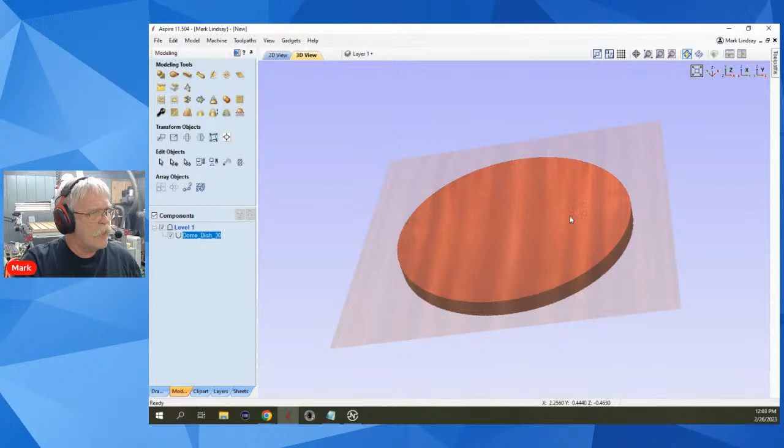Let me get over here and prove my ignorance. We'll get into Aspire, and yes, I'll go over here into my clip art. Let's see, I'll just pull up a shallow dish. Then I'll shift and make that a little bit bigger, and go into the modeling tab, and I'm going to change that combine mode to subtract to make it a dish rather than a dome.

Let's go back into clip art and let's find something else, something to put in here. Lots of stuff already in a dish. Let's see, I'm not even really sure what application to use. Let's go for this - we'll put this in the middle and expand this out just a little bit here.

Do you have a specific question about merge lowest? Okay, and then we'll go back over into the modeling tab. Or is this just an in-general, what does it do, type of question?

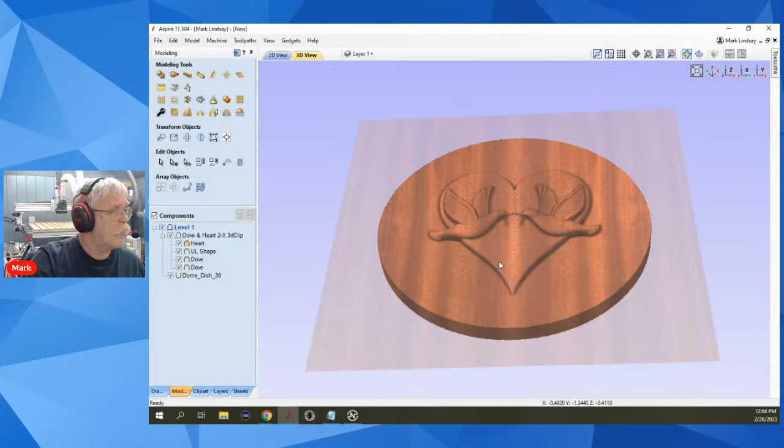Okay, here, let's bring this back up like so. I've got the dove set to add, so it'll sit on top of that dish. Let's go right click into the combine mode. We have merge, add, subtract, merge low - is this what you're referring to?

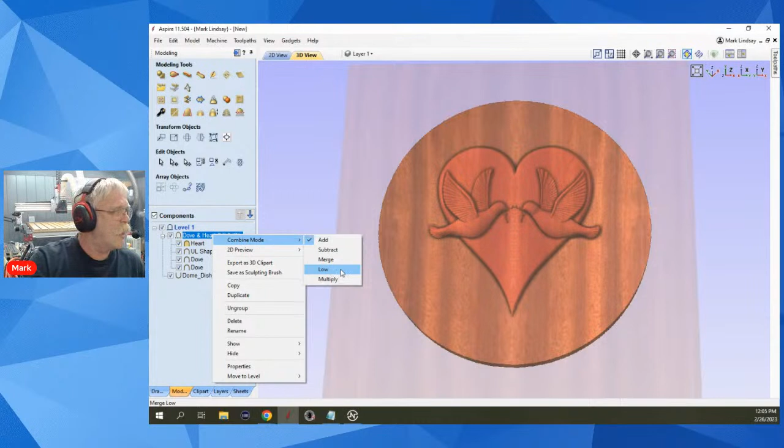The low down here. Now I know there's about a 30-second lag, so when I ask something on screen, it's going to take about 30 seconds for you to hear it. Then Brooks has to type in his answer to my question, so I have to sit here and fill time and bore you guys to death while I'm waiting for him to type in the question. You think so? All right, well let's take a look and see what it does, if anything.

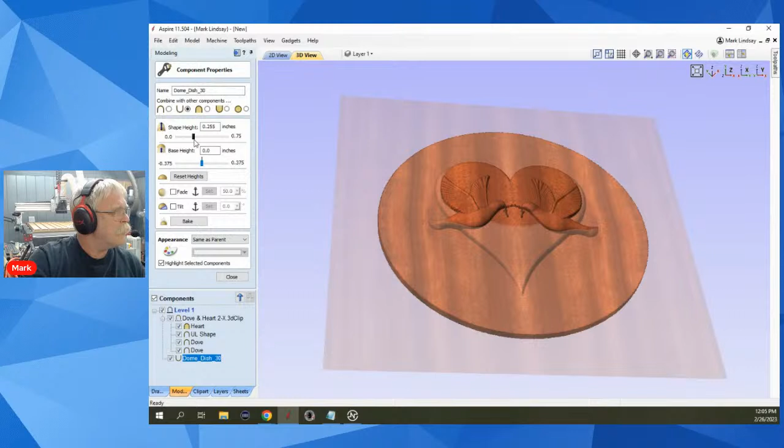I will say this, that Mike Mazalik is the 3D guru, and this is a question I need to ask him about. If we put it into merge lowest, we can see that it just blends in. So here's what we'll do: we'll go back to add, and let's make the thickness on this dish a lot lower. Right now it's 0.6 inches thick - let's bring this down, way down, let's take it down to 1/4 of an inch even.

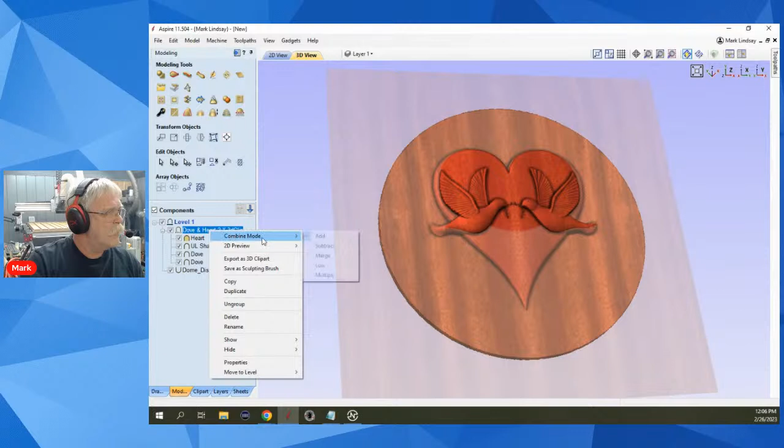Okay, so we have a very slight dish in here. Now if I take this entire model and switch it over to standard merge, it's actually going to raise up slightly off of the top of the dish. Did you see how that did that? I went from merge back down to add, and it just takes the model at its standard thickness and applies it to the top.

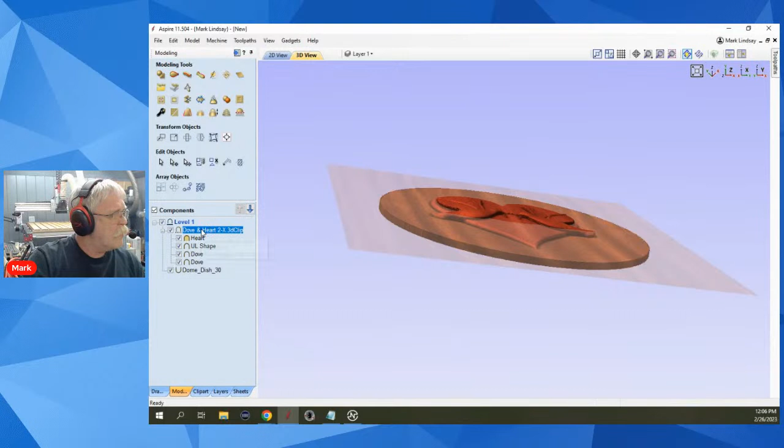So let's switch over to merge lowest, combine mode. There we go, and boom, it blends it down in. I think what it's doing is blending it into the bottom of this modeling plane here. Now, I can't think of an application for that, but that doesn't mean one doesn't exist.

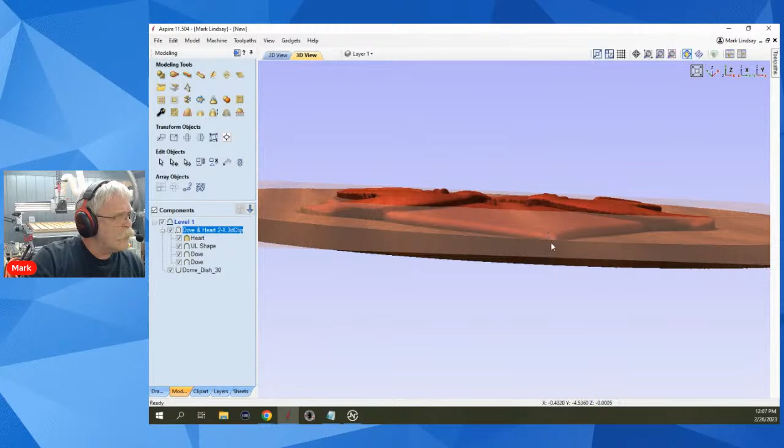No, I haven't used this. I have used multiply. You know what, I'm going to have to get back to you, Brooks, because I'm not exactly sure what application you'd use that in. I'm really not sure. Unless you had something incredibly thick, like you wanted to blend a base down into the bottom of the model. But let me dig into that, because this is definitely something worth exploring.

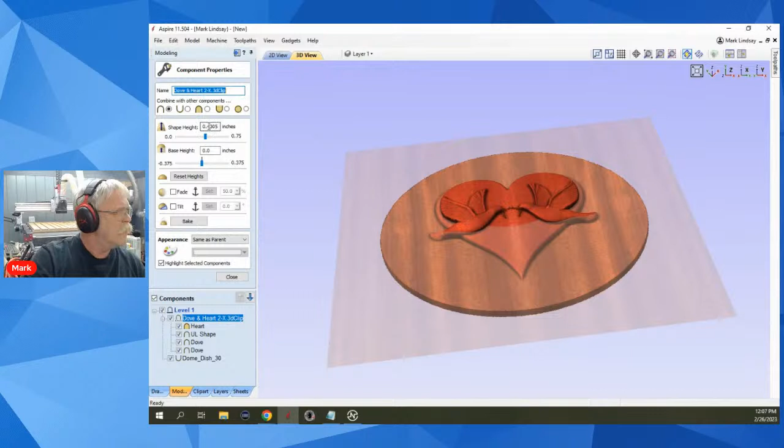Let me look at what the shape height is on this. Yeah, let's set these both even and see what we get here. I don't often get a chance to just play live on camera. Okay, so we've got them both set to the same thickness, and now let's take it to low, and it still blends it right in.

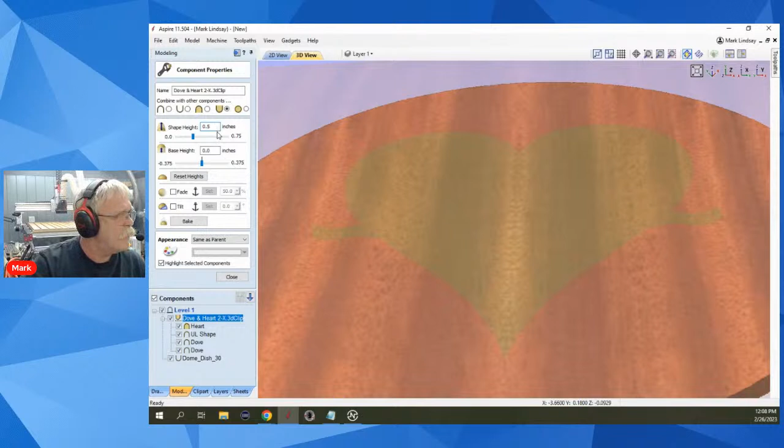Okay, let's do something else here then. Let's go back into the properties on my dove, and let's make it double the thickness of our base model, so that'd be 0.5. And it's still going to stay the same.

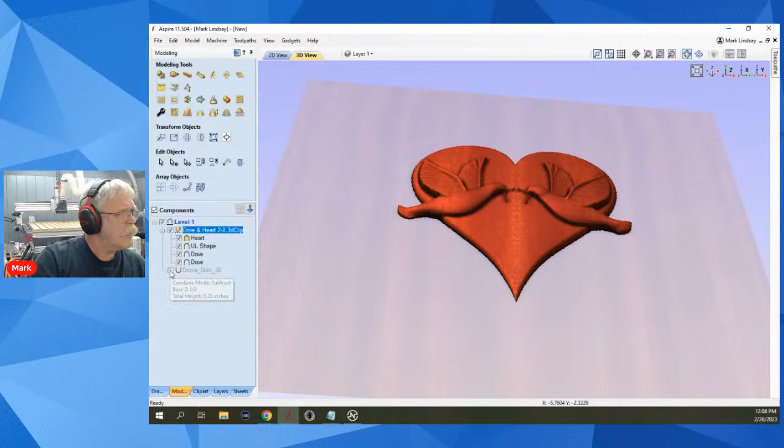Now let me turn off the dish and just look at the dove, and it is above the modeling plane. Turn the dome back on, and let's go to the dome, look at the shape height. The shape height is a quarter of an inch.

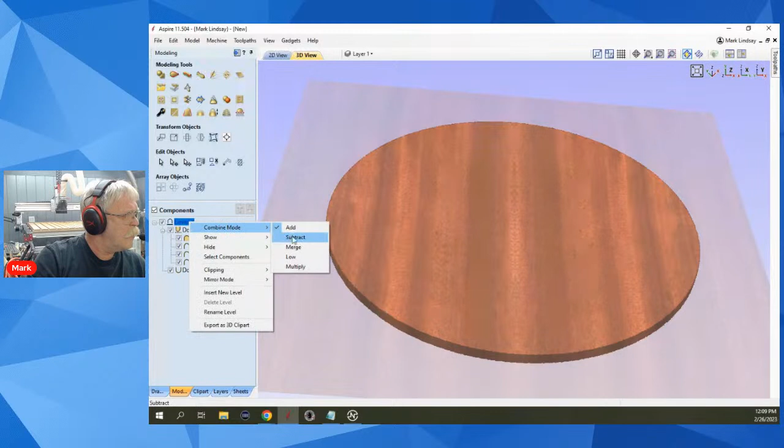I'm going to have to get into that and find out. Now, because I am changing the— oh wait a minute. Okay, I changed the combine mode of the heart, let's change that back to add. And let's go to—yeah, no, that's correct. That is interesting, Brooks. Let me get into that and dig into it a little bit further, because I think—well, that's merge—I think you may be onto something.

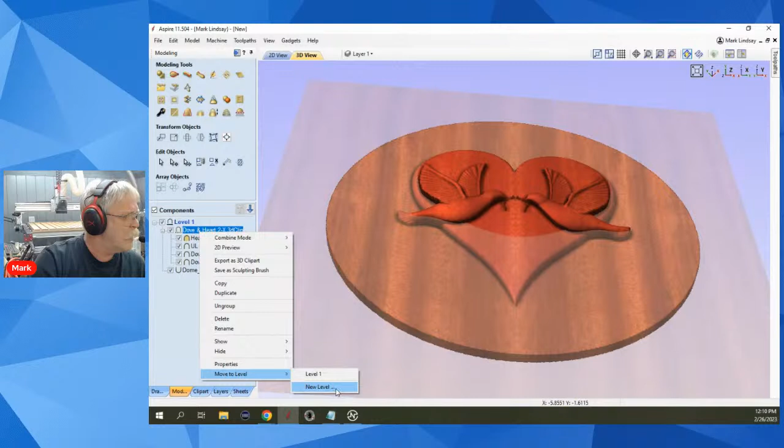If you add another level and move the doves to the second level and merge low, let me try that. You may be onto something here. Let's see, move to level, new level. Okay, add, yes. All right, so we've got two separate levels.

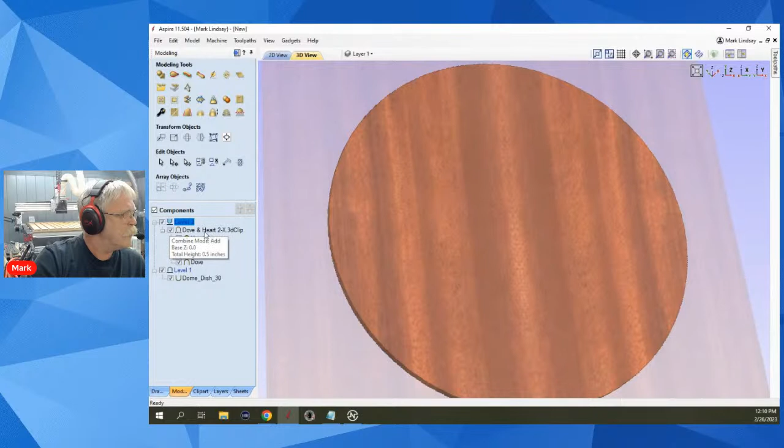Now what I'll need to do is the combine mode of that level, go to low—does the same thing, it just blends it in. It just blends it in. Okay, well let's change that back to—what did we have that set at?

We had that set at merge, right? Yes we did. So it's filling in right there, and the merge will actually bring it up to where it's above the top level of the dome here. But if we have it set to add, it's going to apply it down to the dome itself.

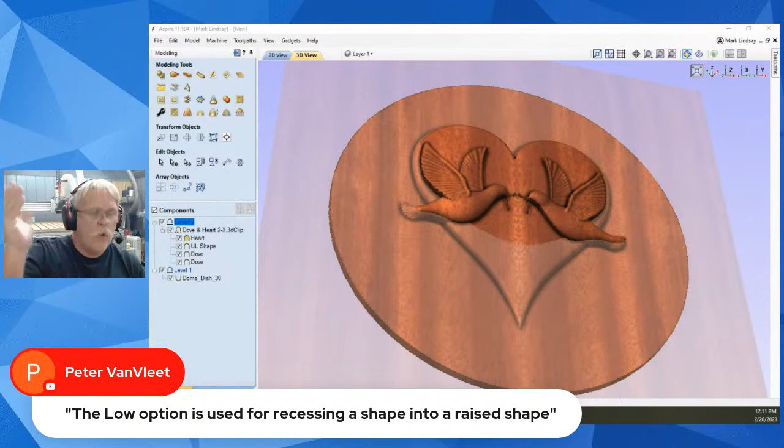Peter VanVleet comes along and says the low option is used for recessing a shape into a raised shape. So that would be, I'm guessing, if I went with a dome instead of a dish. Okay, let's do that. So let's take this and change the combine mode to additive instead of subtractive so that we have a dome instead of a dish.

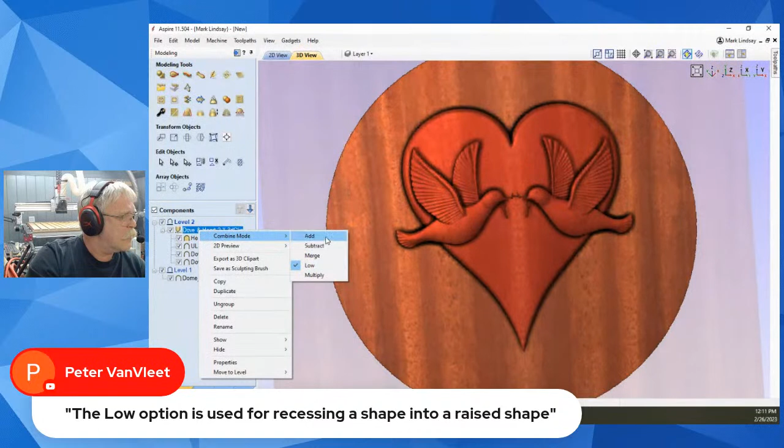Now we'll come up here and drop our combine mode to low, and it did nothing. So let's change that back to add, the way it was. We will change the combine mode of the entire level to low, and that flattened out the top. We don't want to do that. Let's take it back to add.

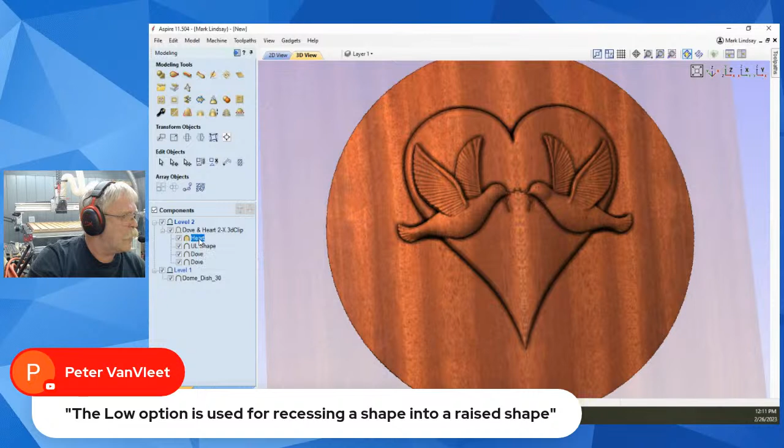Let's leave that, let's just change the heart. Come on, right click—I can't just right click the heart, it won't do it. All right, I thought maybe I could just merge low, and merge low just the dove and heart, but it doesn't do anything. Okay, alrighty.

Peter VanVleet says their example is a raised keyboard key that has a letter recessed into it. Okay, that makes sense. For that I think I would just use subtract, but I can see where that works. Okay, I'm going to play with that a little bit and see how that differs from just using the subtract mode. So let's go ahead and play with that a little bit. Let me delete level 2.

Yes, I want to delete that. Let's go back over here into the 2D view, get into the drawing tab, text, and we'll put a letter into... let's drag you over here about to the center roughly, and we'll just do a giant M. Close, and let's select that, then select that, and let's center it. There we go.

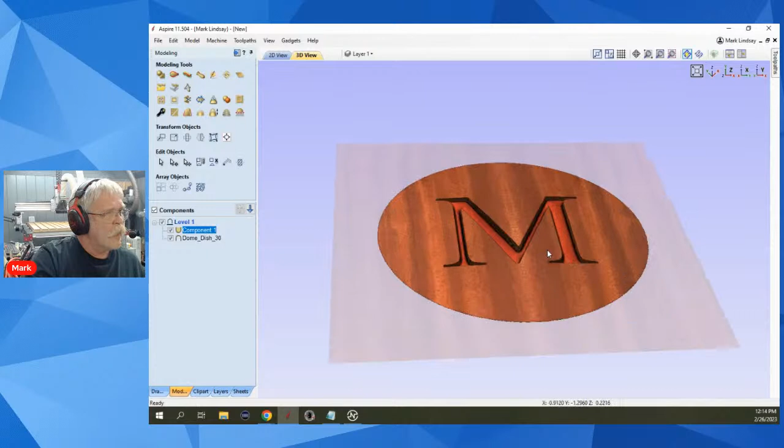Combine mode, low, and okay, I see what it does now. So it's recessing it. It's leaving that dome shape pointing up, but it's recessing that letter M into the dome.

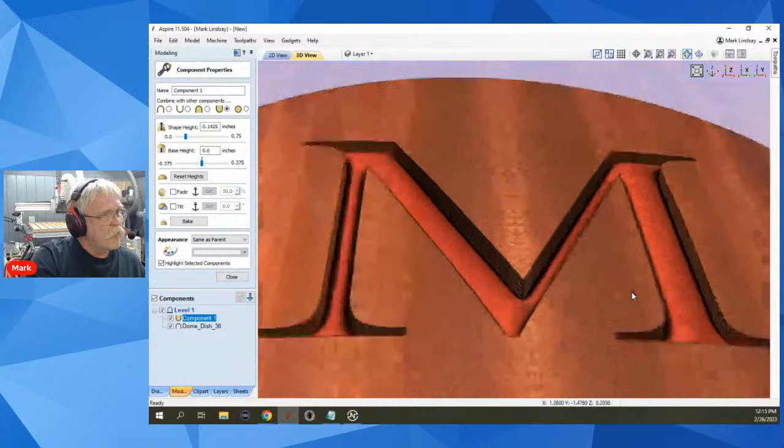Let me, I got it selected. Let's go here and let's make our shape height just a little bit higher. Okay, I don't want to bring it up above the surface. Okay, the dome shape, let me close this and turn off the dome itself.

You can see how the dome shape is still in the positive. Okay.

Now, if I switch the combine mode to subtract, now I turn off my dome, you can see that that dome shape is now in the negative. So now I see what we have going on. All right, that makes perfect sense.

So, all right, switch that back to low. So it maintains its positive shape, but then just recesses that positive shape down into the other positive shape. Interesting. I would have never thought to look at that. But now, excuse me here.

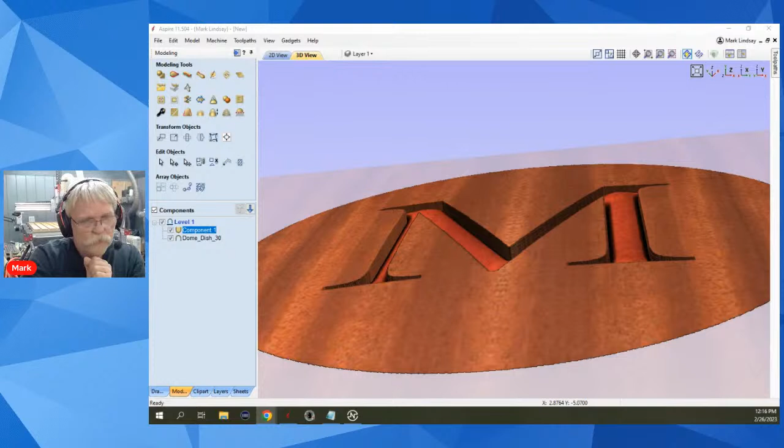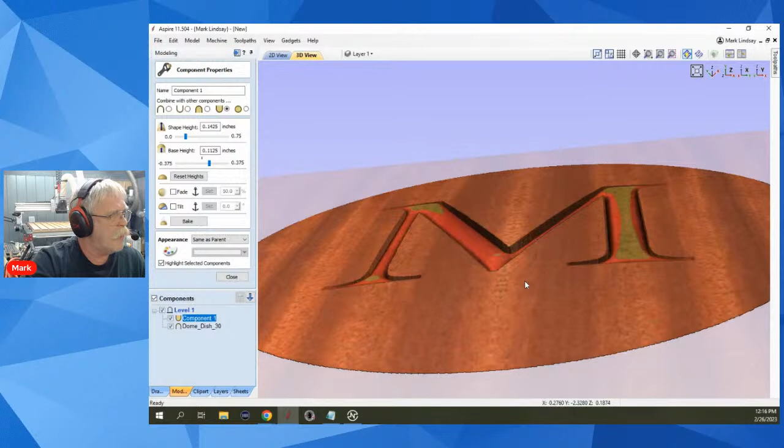Okay, but now let me look at something, because you see how deep that is recessed. Let me see if I can, I've got it selected. Let me go in here and add a little bit of base height to it. See if I can lift that up, because maybe I don't want it.

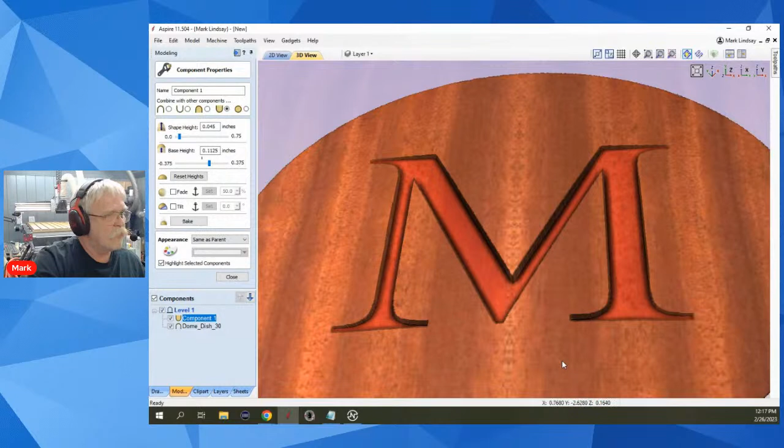Okay, there we go. With it all red, it's below this surface. If I bring up the shape height, you see a little bit of green poking through right here, that green tells me that it's above the surface of the material here. So I want to bring that shape height back down so that it's below all these surfaces and I don't have any green. And it keeps this at a nice flat level. It's not following the contour of the dome. Interesting. Okay. Okay.

My only concern would be getting in and actually carving some of this. You're going to have to use a very small bit.

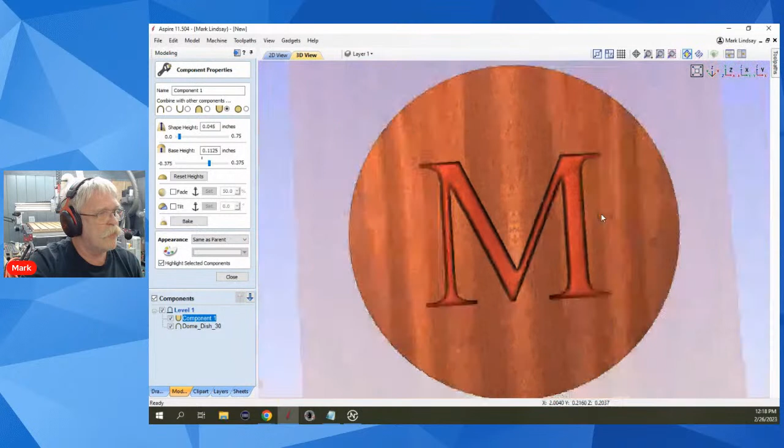Now, let me close this, go back to a straight Z view, click off, and oops, come on, Mark. Straight Z view, click off. Remember, and you're in, all right. We're going to do it that way, are we?

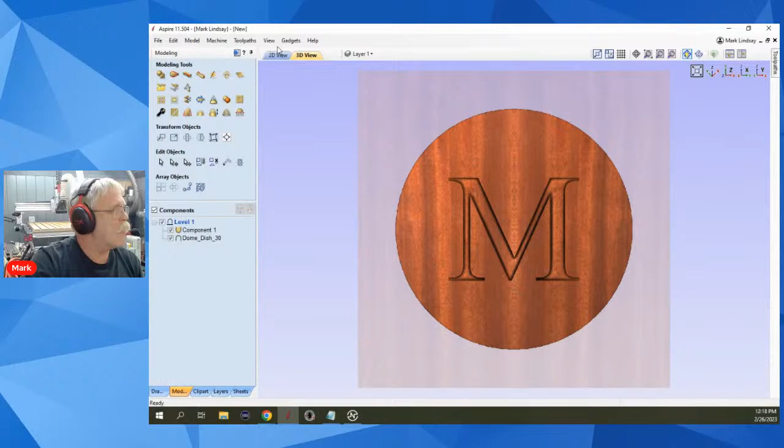We'll go back over to the 2D view then, and we'll select everything and see what size we have here, because I don't remember. Okay, yeah, it's about 9 inch. So a 1/16 inch bit might do all this, get that detail carved in there.

Then again, it might not. We're looking at a small bit no matter what you do. But yeah, that's actually pretty cool. That's actually pretty cool. And thanks for that question, Kurt. That kind of gives me a chance to play around, which I don't really get much of a chance to do.

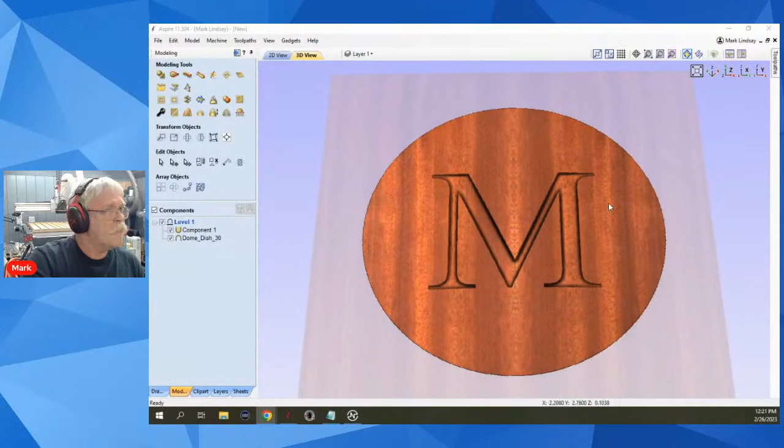Let me go back over to Aspire and we'll share this. I can go ahead and get rid of this. I don't have a bitmap on this computer to load, so we'll delete that.

But I can show you the difference between using layers and sheets.

Mustache hair scraping the mic. Hey, anything's possible. Mark Rolls says it's my mouse clicks. That's odd, it's a wired mouse. It's not a cordless.

Never know. Anyway, the difference between layers and sheets is: layers are like imagining a clear piece of plastic laying over a work table, and each piece of plastic has something else printed on it. You lay the first piece of plastic down and you've got one letter. You lay the next piece down, you've got the second letter. You lay the next piece down, you've got the third letter. Each one of those is a separate layer, but they all make up one design.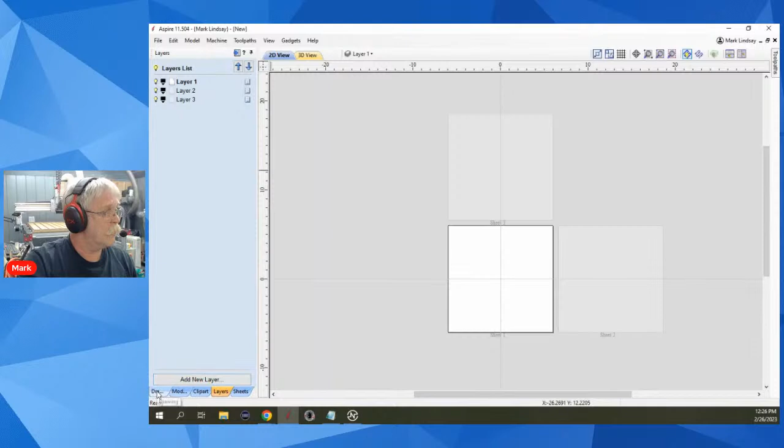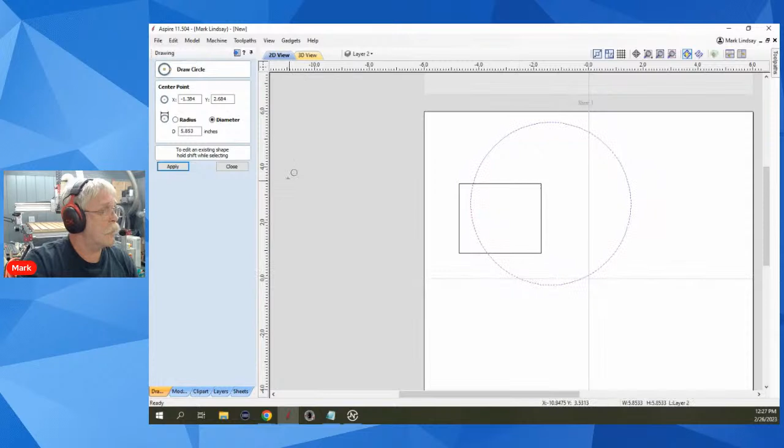Simply because if you move - let's go back into my layers tab. Let's say I go into layer 1, and I'm going to make this as simple as I can. I've got a rectangle here. Now I'm going to go to layer 2, make that active, and draw a circle over that rectangle, just for example.

That's my whole design so far, but I can come up into the layer manager, or go over to the layers tab, and I can turn off that rectangle and just work on this layer. Then turn it back on to check.

If I move one of these vectors, whether by accident or by design, I can move this vector in relationship to this circle, and I know exactly what the relationship between these two vectors is.

Now let me delete this, and I'm going to leave layer 2 up. If I go over to sheets and go into sheet 2 - that's my active sheet now - there's my rectangle over here. If I draw a circle out here somewhere...

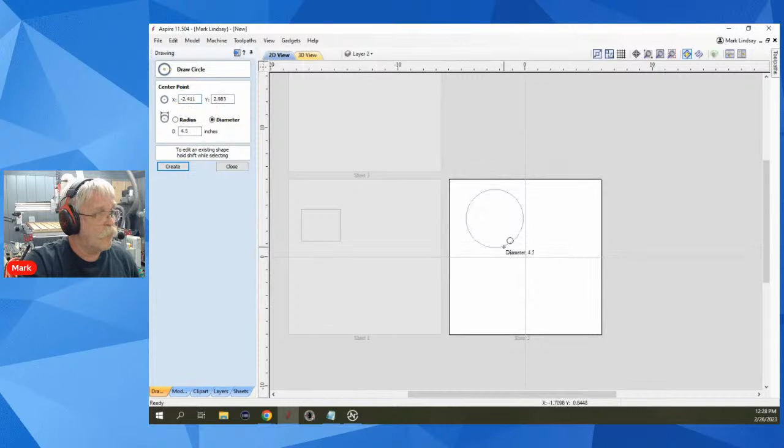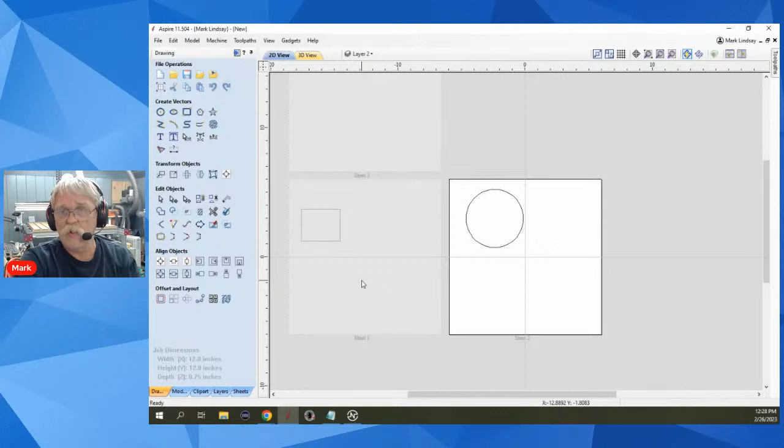I don't know the relationship between those two vectors. I don't know if this one is sitting on top of that one. I can guess, I could pull out some guides and place them, but if I'm keeping everything on one sheet and just using different layers to separate the different colors, it's a heck of a lot easier to keep track of.

Does that make sense? Let me go back into the sheet tab and get rid of these other two sheets. We'll delete, and delete. So I only have the one sheet. Go back over to layers.

They're all on. Okay, I've deleted my circle because I put it over onto something else - we'll do that, close. Oops, I was on layer 2, that's my active layer, but I meant for that to be on layer 1. So click, right click, move to layer 1.

Now I've still got all three turned on, but if I make layer 1 active and turn off layer 2 - oh, nothing went away, that needs to be on layer 2. Move it back, move to layer 2. Now I can turn off layer 2 and just work on everything I want on layer 1.

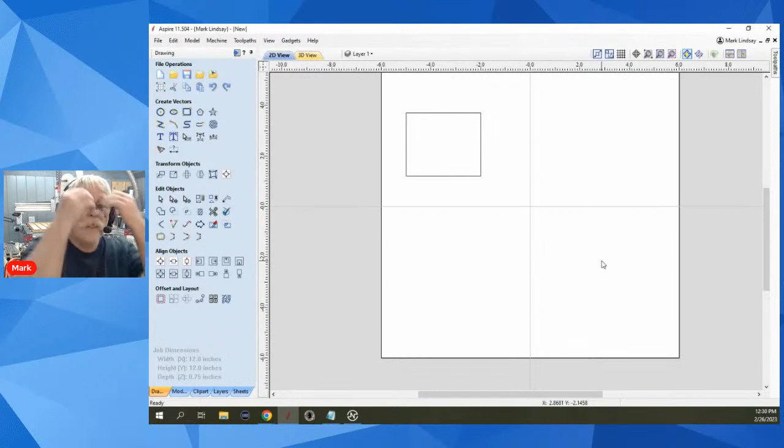I don't know if that's as far as you needed me to go on that, but sheets are more for organizing projects where you have a lot of different parts. I really didn't think I would use that as much as I do. When I first saw it, I thought, okay, great, really appreciate the addition - but when am I ever going to use that? Then the very first project I created after it was introduced, I used it because I had one project.

It was that walnut T-shelf project that I shot video on. I had a back, two sides, and the shelves, so I used it and I fell in love with it. It's like, holy cow, I don't need 3 or 4 different separate files - I can put them all on separate sheets and have one file. And now I'm not losing things.

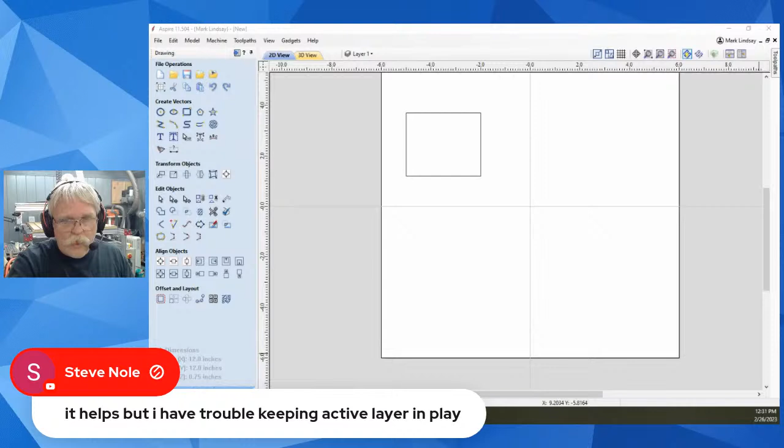Steve says it helps, but he has trouble keeping the active layer in play. Keeping the correct layer in play is something that is important, 100% for sure. It's simply a matter of keeping your eyes up here.

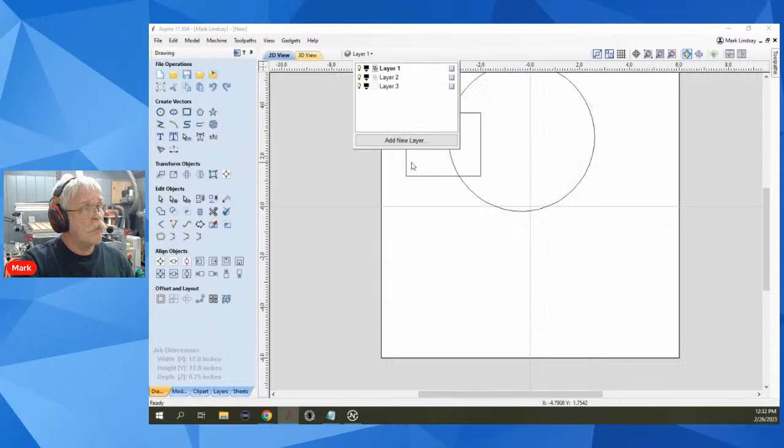Now, forget about the layer tab for just a minute. If we look up here at the layer manager, it says layer 1 - that is the active layer. So just take a look up there. Now if I turn on layer 2, I have the whole thing going here, but if I turn off layer 1, it's red - so layer 1 is the active layer, but I have it turned off.

So just pay attention to what you've got going on up here, because right now, anything I put out here - let me go for an oval - anything I draw out here, now it turned on layer 1 again, you see?

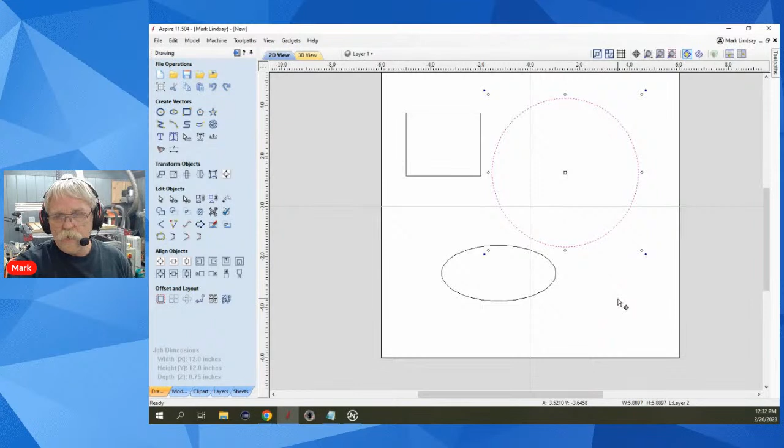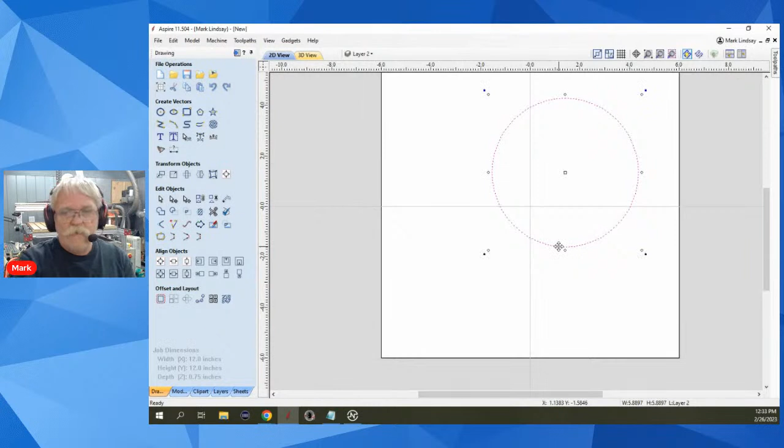Because it was not active, but I tried to add something to it. Now, if I click on this circle and move it, even though layer 1 is active, that change happens on layer 2. So let me make layer 2 active just by clicking the title, turn off layer 1 and layer 3, which has nothing on it.

And any change I made was made on layer 2, even though layer 1 was active. So the only thing you need to remember is which layer you want to work on. You need to make sure that layer's name is right here in your layer manager. And that just becomes habit. So you click, turn on all of your layers. You've got your design created.

Go into your layer manager, turn on all of your layers. Now, if you get a situation like this, look at these icons right here, the third in - you have the light bulb, then the little screen, then this third icon here. You can see this little rectangle, and it has some vectors in it, what looks like a drawing, but then layer 3 is blank. That blank means it's an empty layer.

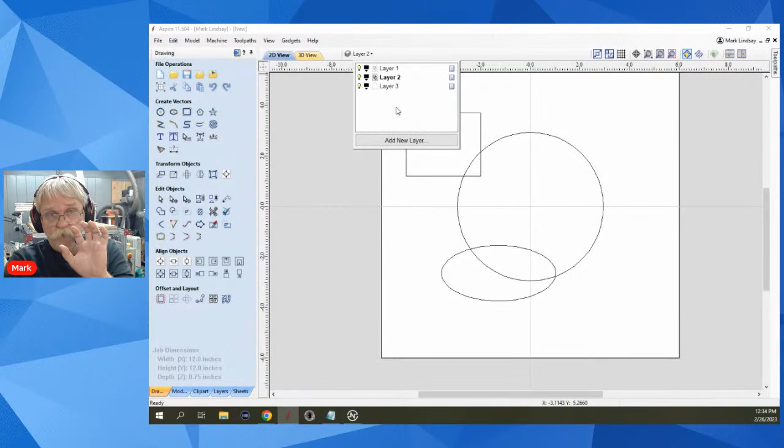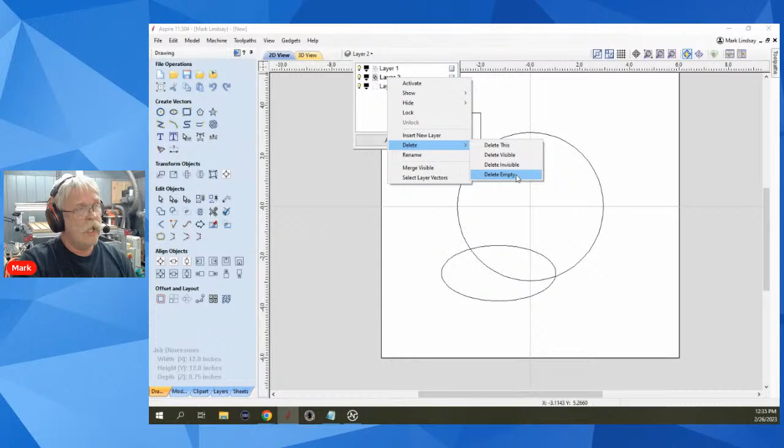Just to help keep track and keep things organized, if you have an empty layer, there's no sense in it being there, whether you created that layer or not. What you can do is right click, go to delete, and the bottom choice is empty. I'll do it again - I went to my active layer, right clicked, went to delete, delete empty, and all it did was delete that empty layer.

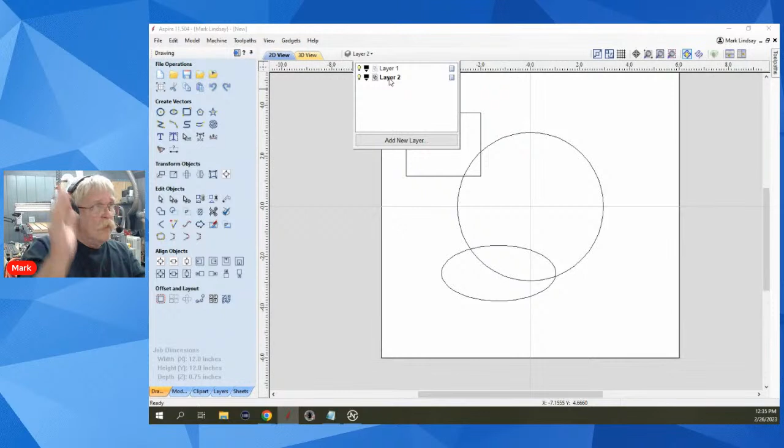It did not affect layer 2 at all. Now you don't have to do that - you can click any of the layers and it'll do the same thing. But I wanted to let you know that if you think you've made a mistake and went, oh no, I did that on layer 2, that's my active layer, or that's a layer I want to keep - if you select delete empty, all it deletes is any empty layers that you're not using.

Chris Copanal asks, how many layers did the pirate end up being? I want to say it was 6, maybe 7. I don't think I have that file on this computer, but I think it was 6 or 7. The most I've ever had was 8 layers at one time, and that can get a little out of hand.

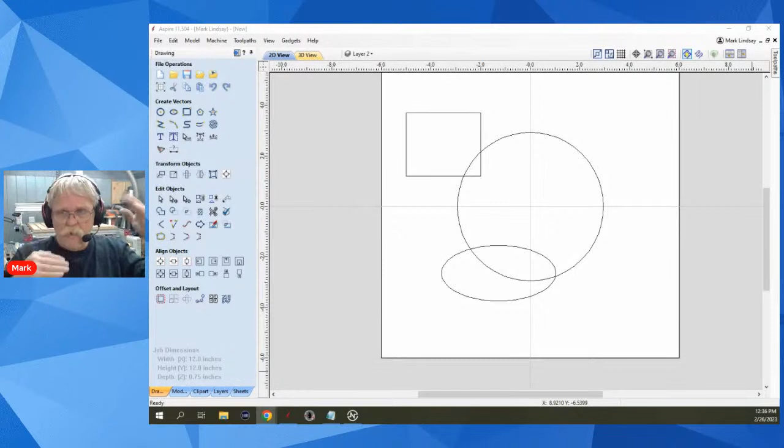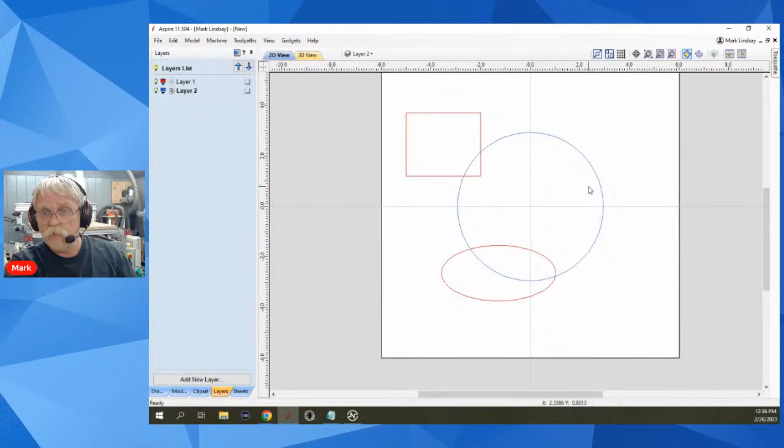That's why you have the option of setting a color for each layer so you can visualize and keep track of things. Let me go back to my layers tab. It's like this second icon - I can change this to, let's say, red. So now everything on layer 1 is red. And then I can come to layer 2 and change that to light blue, so now everything I put on layer 2 is going to be light blue. You can kind of keep track of that, and it does help.

So I could make a new layer and change that color to green, for instance. And then anything I add - I'm in layer 2, so anything I draw now is going to be in that light blue color. Let's add another oval over here just for giggles. That's good - if I click off, it's blue, same as this circle, because they're both on layer 2.

That could be another signal to yourself, Steve, of which layer you're in. If you change the color of that layer and draw that blue oval and go, oh no, I meant to put that on layer 1, that wasn't supposed to be on layer 2 - this will help answer this question here.

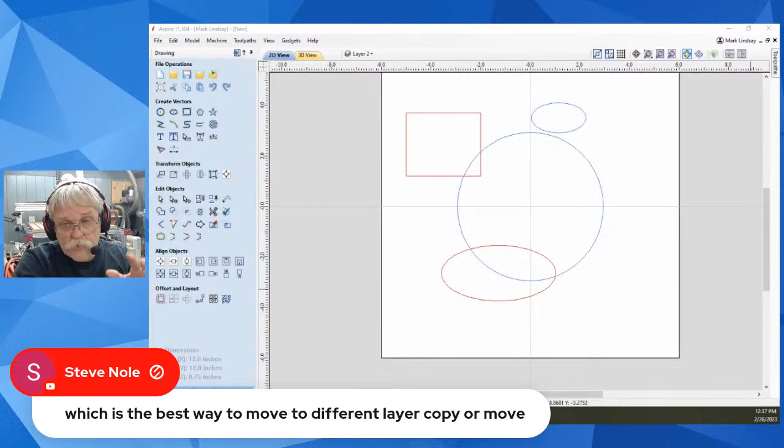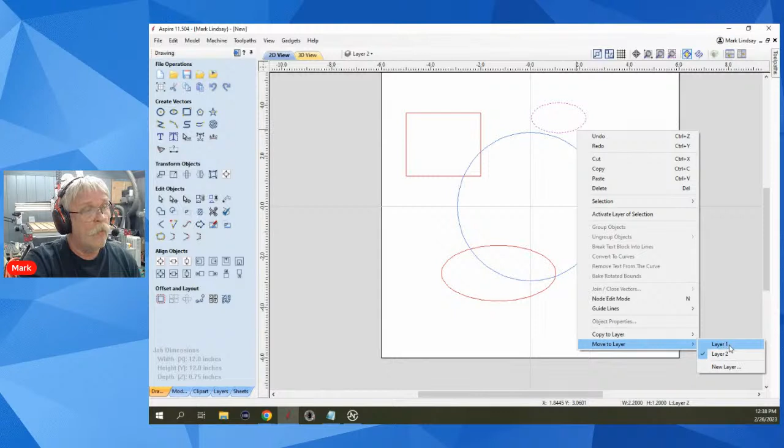Which is the best way to move to a different layer, copy or move? It depends, because I can make a case for both. I'll make the case for the second one first - if I make a mistake and put this on the wrong layer, I don't want it on layer 2 at all, I can select it, right click, move to layer 1, and now it's red because it's associated with layer 1.

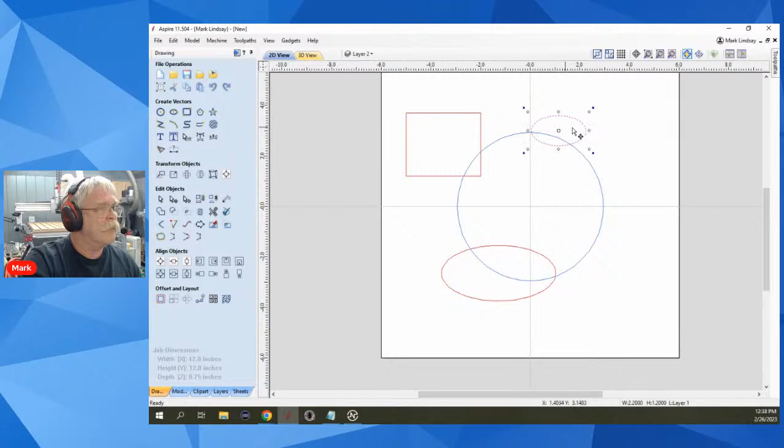Now let's say I want to weld all of these together, because after I've V-carved all of these, I want one single outline vector for my profile cutout. So I'll select them all, then copy them to a new layer, layer 3, and change that color to green.

Okay, so now I've got all of these copied to layer 3. I'll click on layer 3 to make it the active layer, turn off layer 2, turn off layer 1, close it. Now I've got all my vectors, I can select them, find the weld tool, and weld them together. Now I have one vector for my profile cutout.

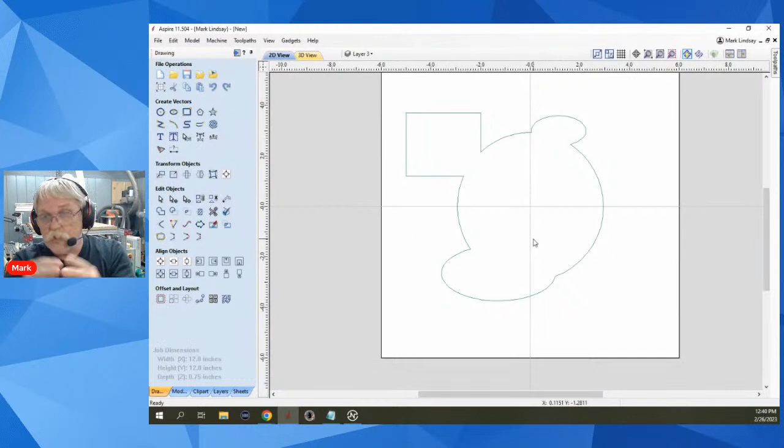So there's a case to be made for both. If you need to copy a vector to do something else with it, then copy is correct. But if something is on the wrong layer, or you decide later you want to put something on a separate layer, then move to is the right one.

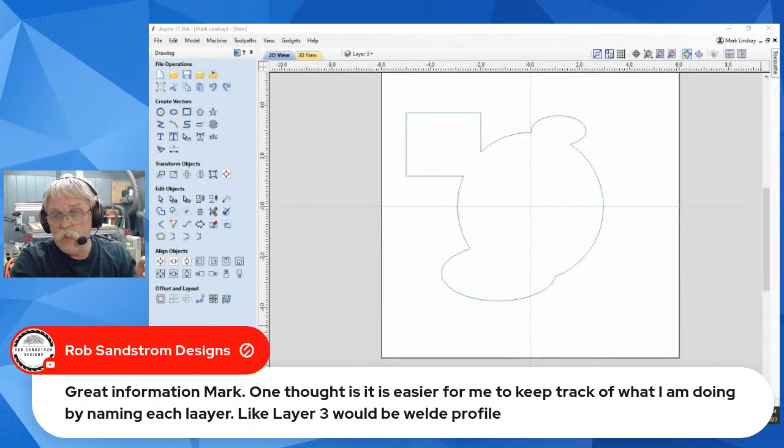Now, Rob brings up an excellent point here. It's easier to keep track of what I'm doing by naming each layer, like layer 3 would be the weld profile. Yes, absolutely. I was trying not to confuse the issue by throwing extra things in, but 100% correct.

Just come up to layer 3 and click in there and call that, like he said, weld layer. Personally, I would name it cutout because that's the vector I'm going to use for my profile cutout. So I'll change that to cutout, hit T and just click off, and that changes that.

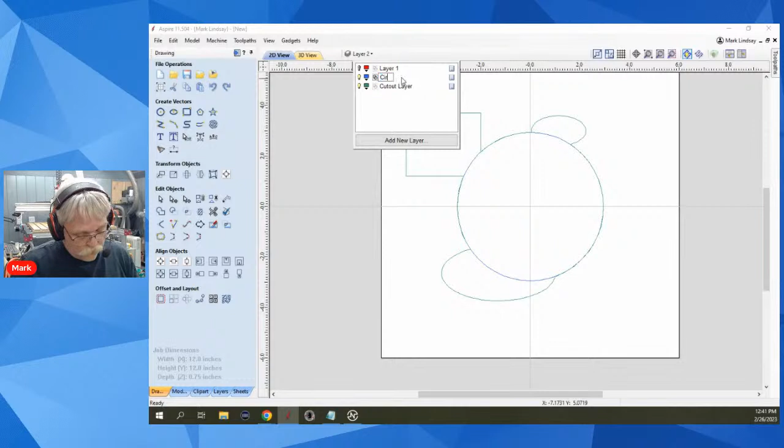And then you could also obviously change the names of the other layers. Okay, we'll change that one to circle. There we go. And then let's hit enter.

Let's turn this layer on, and we have a rectangle and two ovals. So I tell you what we're going to do, we're going to change this to ovals, enter. I'm going to add a new layer and call it rectangle, enter. I'm going to change that to orange.

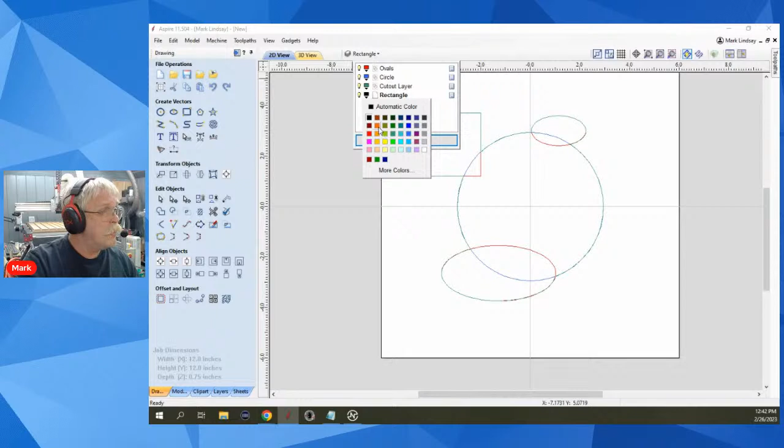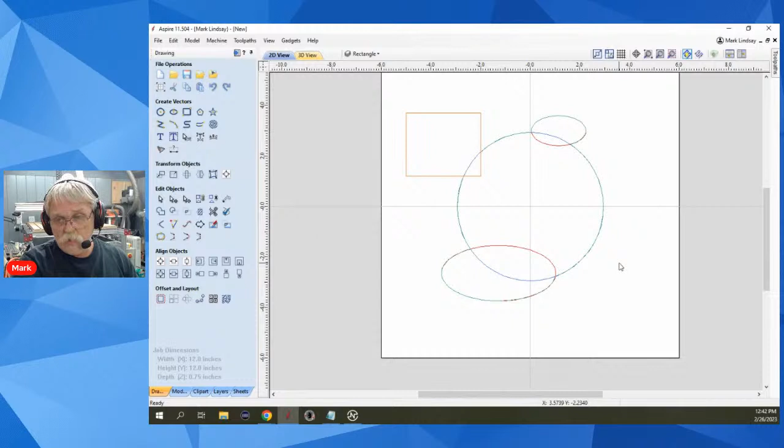Close. I'm going to select the rectangle, just the rectangle, I don't want to select the outer boundary. Right click, move to layer, rectangle. So now all of my shapes are on separate layers, each one of them named.

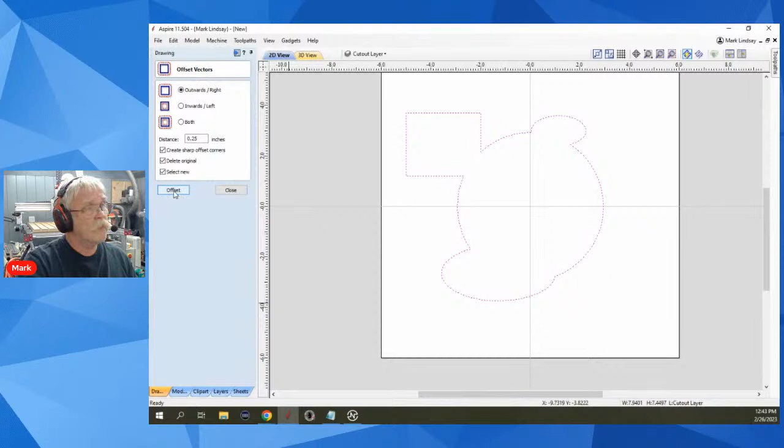And I can turn off the ovals, I can turn off the circle. If I want to work with the rectangle, I can turn off the cutout. If I want to work with the cutout layer, I'll select it to make it active, turn off rectangle, and now I can take this and offset it outwards by a quarter of an inch, delete the original, offset it.

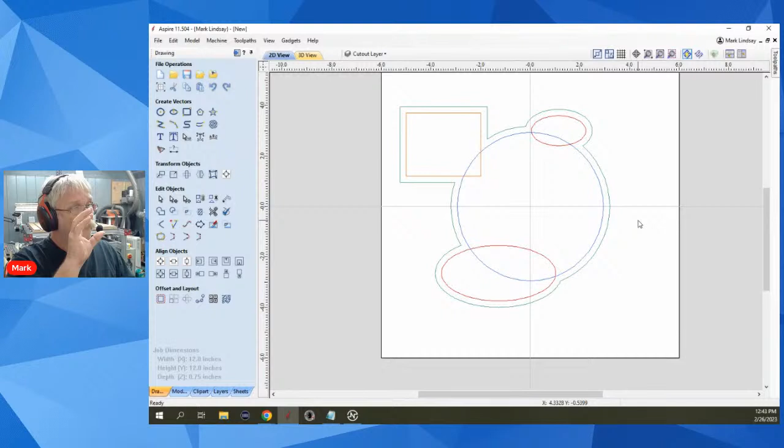Naming the layers is an excellent point, and it is something that should be done. For instance, when I did the pirate, and I showed this in the video, what I tried to do was take each layer, each color I was going to pour — for instance, the peach for the flesh tone — that went on one separate layer. I named it peach and tried to make the color it was drawn in that peachy color. Then for the black, I made the color black and named it black.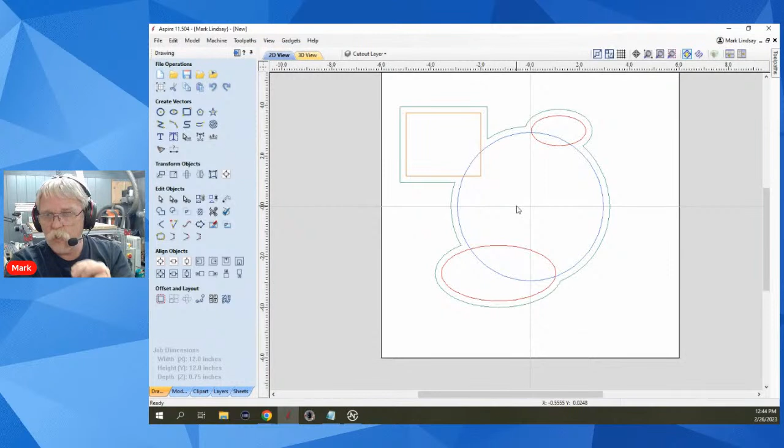For the white, I couldn't use white because I would never see the vector. I think I went with a real light gray, but I named that layer white. When I did the gold for the earring, I named that layer gold, and I went with kind of a goldy color. So naming really does come in handy.

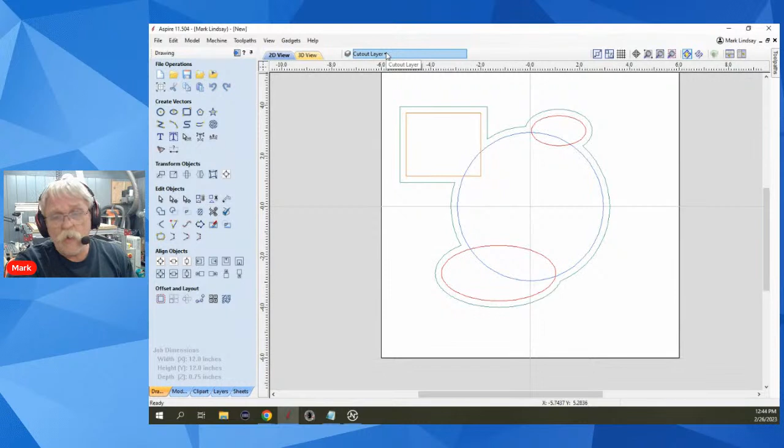And that will help you keep track of what's going on, because if you want to work with the rectangle and you look up here and see cutout, now you know you got to go work with the rectangle. So let me shut all the rest of these off so I'm not confused, and that's the only thing there.

Okay, let me turn all this back on here. And I did see your question, Sargon, I'll get to that in just a second. Jack in the shop has a very easy one to answer.

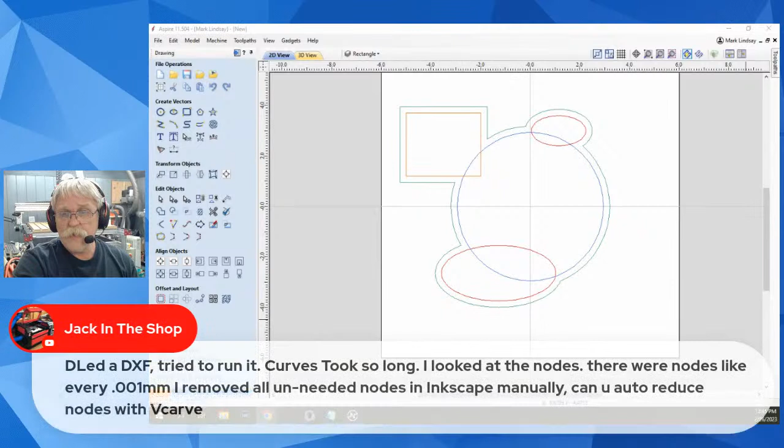Downloaded a DXF and tried to run it. The curves took so long. I looked at the nodes, and there were nodes like every thousandth of a millimeter.

Kind of unfinished business from last week - a thousandth of a millimeter has a name, and that name is micron. We're talking, a human hair, depending on averages, anywhere from 35 to 65 microns. So we're talking tiny, tiny stuff here.

I removed all unneeded nodes in Inkscape manually. Can you auto reduce nodes with VCarve? Yes. And you're going to hate me for telling you this, Jack.

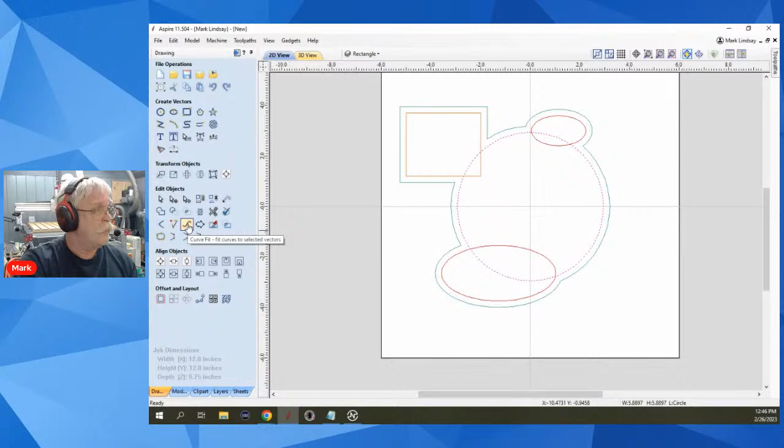Select the vector - it's not going to really show much here because I created these vectors in Aspire. Select the vector, come right over here under Edit Objects, third row down, third icon in, Curve Fit. Click on that, and you have 3 different types of curves you can fit to those vectors: circular arcs, Bezier curves, or straight lines.

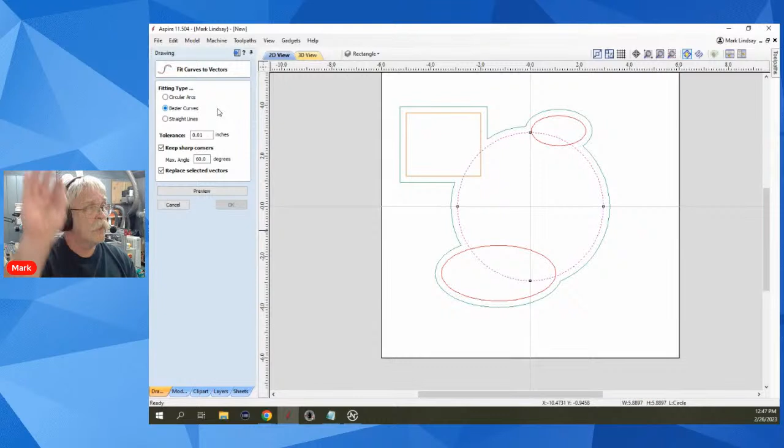I tend to go with Bezier curves. Somebody is going to tell me that CNC controllers don't like Bezier curves - stop typing, I know they don't, but I've never had an issue.

I select Bezier curves, then I click preview. Here, it's probably going to add nodes, but you can see the preview I've got going out here. I've got 4 nodes because this is made up of 4 arcs.

So if I click preview now, it's going to convert these arcs to Bezier curves. And it did - I now have 7 nodes where I used to have 4.

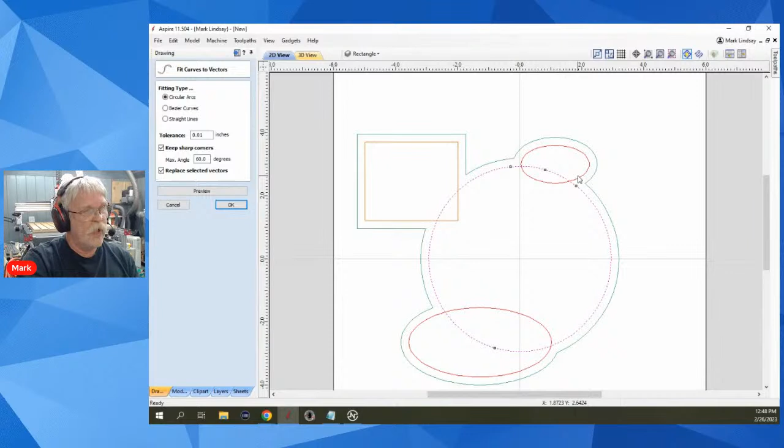Let me go back to circular arcs, preview it, and it changed the whole thing again. I still have 4, but look at where they are. I don't want to use that.

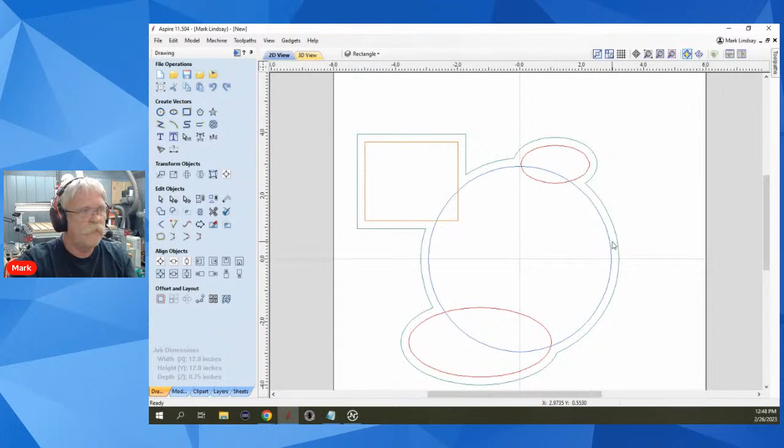Cancel. If you import a DXF file, generally speaking, depending upon the age of the file, it's made up of a bunch of straight line segments. Select the vector, come over here to curve fit, decide if you're going to use arcs, Bezier curves, or straight lines, which is usually my last resort.

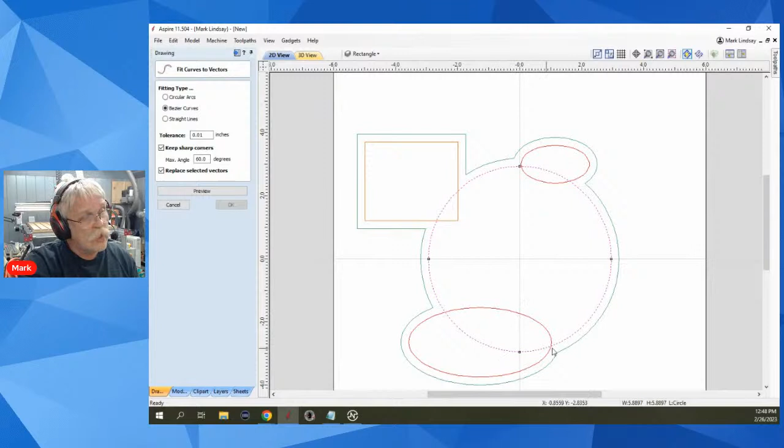I generally don't use straight lines. I generally use Bezier curves. Click preview and then look at the...

Oh, you know what, RB, you're absolutely right - my profile. Yes, there we go, good example. Look at how many nodes are made up in that oval. Thank you, RB.

Look at how many nodes make that up, and the same thing down here. Is that kind of what you had going on, Jack?

Well, then you're going to like this. I'm just going to preview it using Bezier curves, preview, and there we go - we've reduced that. If that's acceptable to you, click OK. That's it.

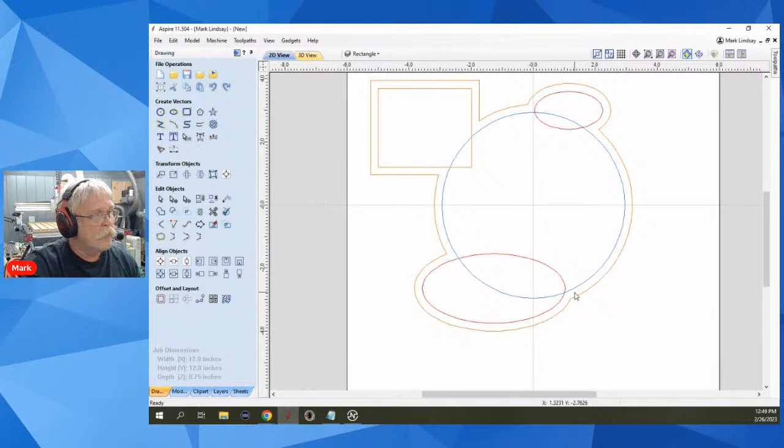I can select, tap N to go into node editing, and there are my points. Now let me Control Z to undo that, and you can see how many points I have.

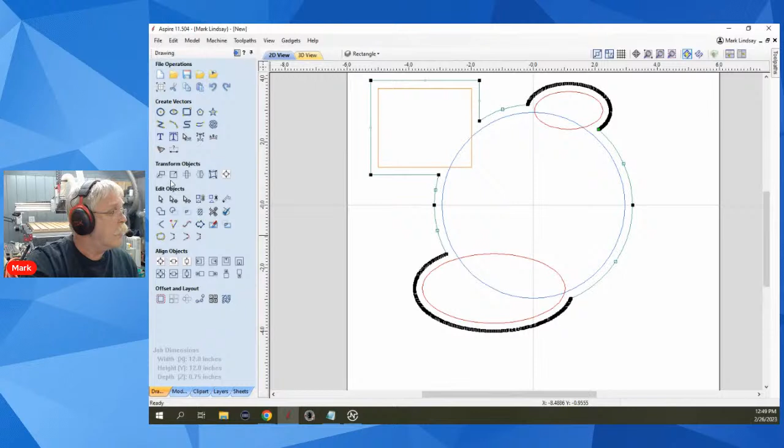Let's try circular arcs - I've got it selected. Go into curve fit, let's change to circular arcs and preview it. That's still better, still a heck of a lot better than it was. So that would probably be a toss-up, maybe.

We'll click OK and just accept that. Now when I go into node editing, I still have more nodes than if I used Bezier curves, but it does help.

So I hope that helps you there, Jack. You do not need to go back in and remove all those nodes manually. And I feel for you, because before I discovered that, I was doing the same thing.

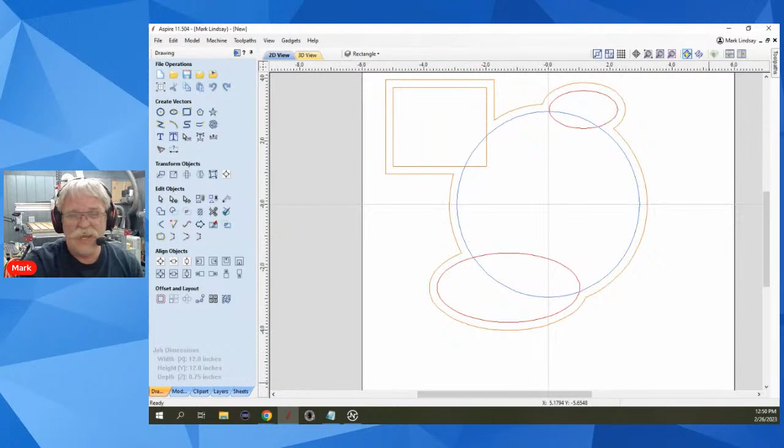Sargon asks, excuse me, simple question about move: I should be able to enter the distance I want to move in either X or Y, say a quarter inch, by entering where it shows X and Y values, X plus or minus, Y plus or minus, etc. My X-axis is doing it right, but the Y moves way off.

Let me ask a question. Remember that positive moves in X move to the right, and positive moves in Y move up. Are you going with positive when you want to go negative, or negative when you're going positive? You say the Y moves are way off. I don't know. If you're entering the information correctly, it should move the correct amounts.

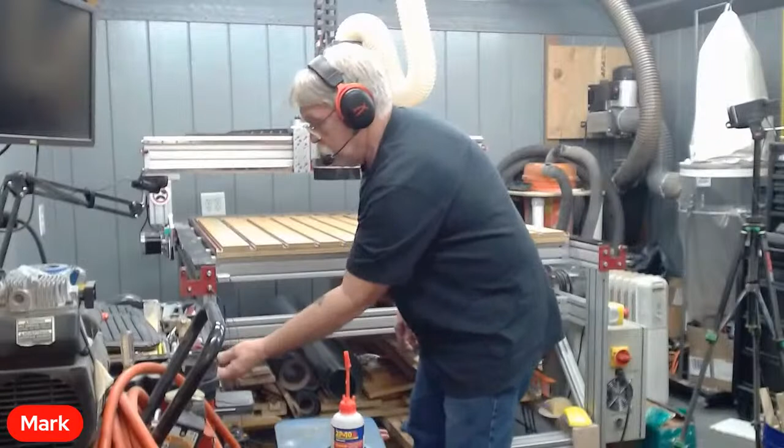My suggestion would be to use a V-bit. Amana does make a V-bit. And remember, a lot of people get confused about this. I'm looking for my Amana bit — I haven't run away, I'm just looking for it here. I think that's it — that's it right here. A lot of people get confused about this.

You say that bit is 6.2 degrees. When we're talking about a tapered ball nose — I hope you can see this — okay, there we go. That is an Amana 15-degree V-bit. See how sharp that tip is? That's almost as sharp as a hypodermic needle, I'm here to tell you. It will eat your lunch.

When you're talking about a tapered ball nose bit, you're entering one side angle. That Amana bit you mentioned is 6.2 degrees. This is a 15-degree V-bit, and a 15-degree V-bit takes both sides of that angle, so the side angle of this is 7.5 degrees. I would use this bit rather than that tapered ball nose bit.

Okay, and I know you don't want to hear that because it means spending more money. But Brooks Martin says it's a 0.0156 tip radius per Amana's tool database — so that would be about a 64th of an inch radius. You're going to have a 1/64th inch radius in your female, and a square corner in your male. I would use the 15-degree V-bit.